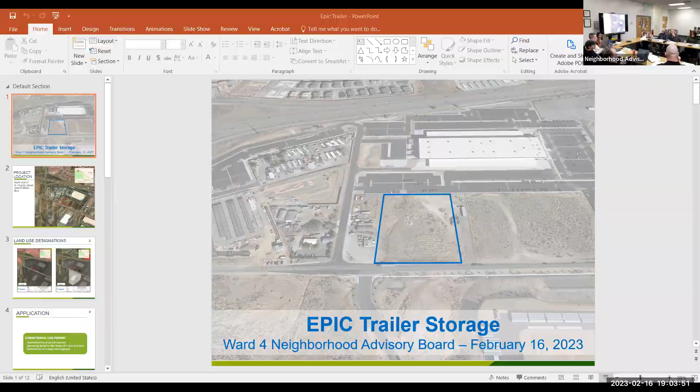Good evening, Mr. Chairman, thanks for hearing our item tonight. My name is Mark Sullivan, I work with NV Energy, and we're going to present to you Peavine Substation. What we're hoping to get out of this is to get some feedback and to educate you guys about what we're doing and why we're doing it. A lot of times when I look at neighborhood advisory boards, I heard somebody mention a citizens advisory board for Washoe County - there's a lot of nuances that people have in the neighborhood that we're not aware of because we don't live in this valley. I grew up out in Spanish Springs, so I'm pretty familiar with that.

I actually sat in the CAB out there for many years, so that's what we're kind of looking for. If we can make it better somehow, you guys would know how to do that, right? You could provide us with input about nuances we're probably not aware of. So hopefully that's what we're going to get tonight, some input from you guys.

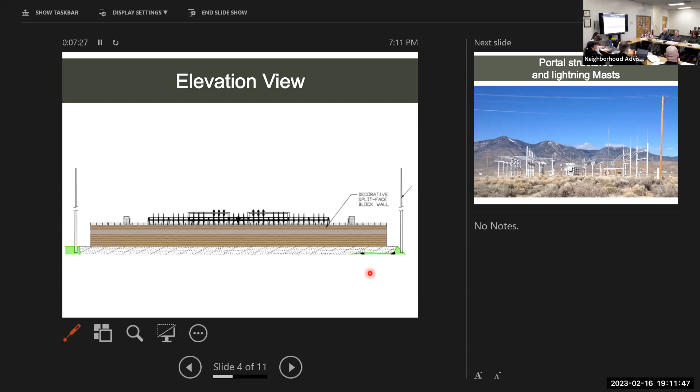This is an example of a substation, just because I didn't have an example of what ours has. If you look at the very far right side, you see a wood pole. To the left of that is called a portal structure, and we're going to have a portal structure at ours. The average height of a bus, the lower stuff that runs across the whole site, is about 22 feet at this site, and that portal structure comes in from the transmission lines. The transmission lines that run down Virginia Street are a 70-foot pole, but we bury 9 feet of it, so it's 61 feet above ground level.

So the wire that comes off of that and goes into the substation, I would anticipate this can be a shorter pole that's going uphill a little bit. But I don't design this stuff, so it could be as high as 90 feet to get up high enough to drop down in. We'll have a portal structure like that, and that portal structure is 45 feet. Then you see those thin masts on top, those are lightning arresters. If lightning comes into the substation, it grabs it there and grounds it so it doesn't knock the substation out.

So with those all told, you've got 45 and 50, about 60 feet in height. I can't imagine why you'd need a 90-foot pole, but that's what somebody mentioned to me - I think it'd be 85 or 90 feet. I think they're going to be closer to the power poles on Virginia Street. So anyway, the highest structure will be those structures outside of the poles coming in, the getaways going out.

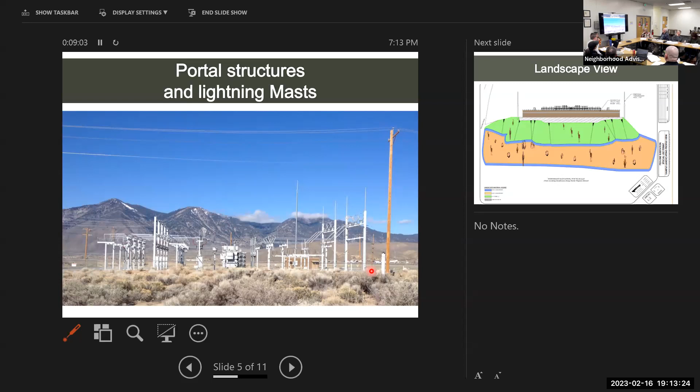So the next side, some of the concern - we don't have any water at this site. Typically when you don't have water at a site, you don't do landscaping, you use native landscaping, native seed mixes, spread them out there, and over the course of a few years you get some vegetation. We're going to try to do the least amount of disturbance to the soil that we can, because the native plants that are there today help a lot with soil erosion. But this is kind of a departure away from what we would typically do.

These are like the structures you see on the side of NDOT. You'll see goats, or a sheep herder, or I think it's kind of weird, the one down in Carson City where they have a deer right by the highway. It scares me every time I drive - I think someone's jumping on the highway.

So we don't want to get anything close to the road, but this was just a sampling - there's some cactus, some different types of plants. So we want to get some input from you guys. If there was something, like the history of the area, that we could do out there, some kind of scape or whatever it is, we'd be open to that. We'd just like some input on what you guys think of this, or if you have ideas of what we could do out there that fits the area better.

I know you guys talked about traffic - we don't have any traffic. During construction you're going to have traffic, but we won't have any traffic otherwise. We usually visit a site like this, a substation, about once a month for routine maintenance, to check on it, check on weeds, that type of stuff. We don't have a lot of fire calls, we don't have a lot of police calls, we don't have a lot of services to speak of in general. So there's not a lot of impact from these as far as the services or competition for services in the community.

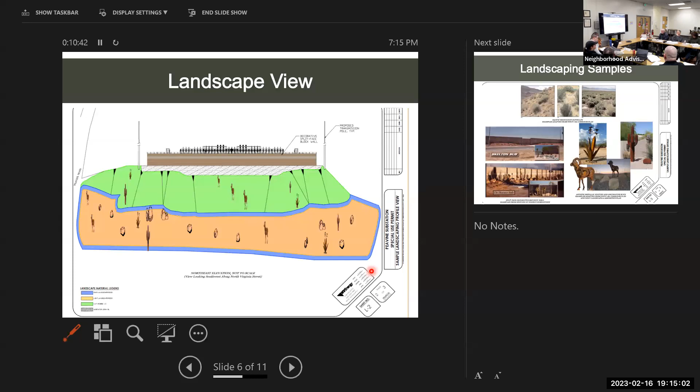Can we go to the next one? So this is some of the stuff that I just pulled down. The stuff on top there is kind of the native soils, what's out there now - you'll see some sagebrush or different types of, maybe greasewood or something like that, native in Nevada.

A couple on the left are actually some substation walls that we've done down in Vegas. And I hate to use that word up here - it's even more embarrassing, my daughter's a UNLV graduate.

The game's coming, though. They're coming up here to play basketball, so we'll get them. Anyway, so this is, I apologize, I digress.

So those subs are just an example of the wall, similar probably to the type of wall we're talking about building out there. You can see that goat is one of those ones that was off of NDOT's. There's cactus, some kind of aloe vera plant or something on steroids, it's huge. So anyway, they have quite a few different designs.

If you get off the freeway heading northbound 395, like going to Plumb Lane, on the left-hand side they have a couple like 3 or 4 trees. Out in Carson, they have those birch ones, but they're kind of weird because they're cut off, only like 15 feet tall with 4 or 5 white ones. I thought that was kind of out of place, but anyway, we'd like your guys' input on that.

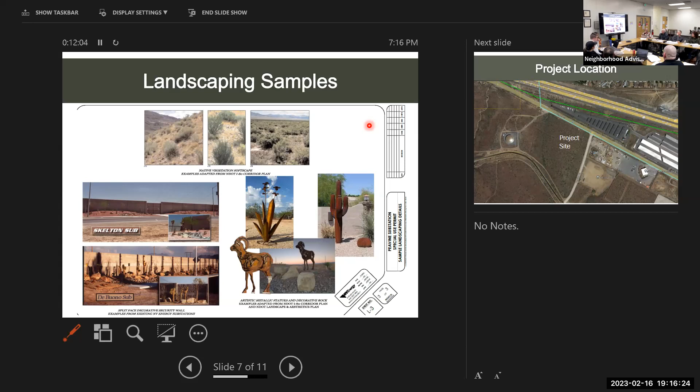Can we do the next one? So this gives you an idea again of the project location. That's Virginia Street, you see the water tank there? We're in between that water tank and over the right-hand side, you can see the dirt that appears to be graded. We're in between those two, at the spot right there where it says project site.

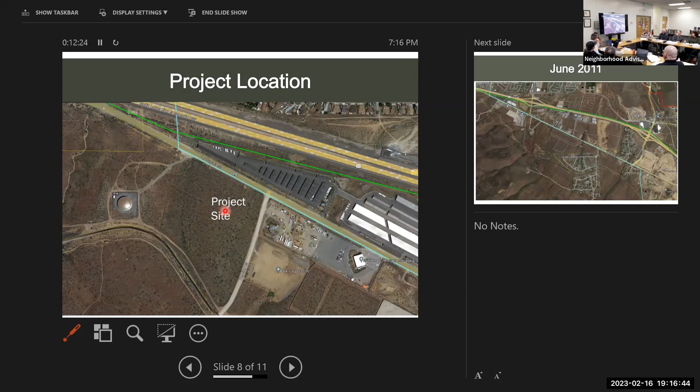Okay, can we go to the next one? So this was just to give you a little bit of an idea again why we're doing it. When I'm telling you we're running out of power, what we're running out of power to provide is the people that we currently have. My daughter, I just got done doing some work at her house, I put a microwave in and didn't have that.

She's over off of Wells Avenue and Holcomb, a 1924 house. So it didn't have a microwave, didn't have a garbage disposal, didn't have a dishwasher, didn't have a fridge with an ice maker. None of that stuff was anticipated back then. And now you've got people hooking their cars up to the system and charging their car. We just didn't anticipate the load growth that you're getting.

And so we track this stuff, and we try to anticipate when that load growth is going to exceed our capacity to serve. And then we try to plan something to put in. So that's what causes this.

Not to mention any kind of residential development, but this will serve all the businesses you have out here as residences, to give you more reliability - schools, churches, hospitals. Is that hospital out here? Not yet. I apologize, let's strike that. Okay, can we go to the next one?

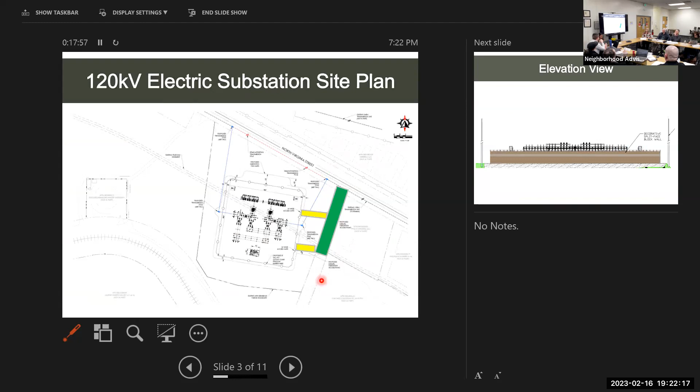Okay, thank you. So we will tie off Valley Road, it comes up to us. If there was an outage or something on the existing line, is there an alternative source to maintain power in the North Valleys? That's my question. Yeah, that's called the N-1 contingency, and we're required to plan for N-1 contingency. So if something gets knocked out, we have another way to serve you. We always like two ways to be able to serve somebody.

And so we have plans. In the system there are contingencies that can't be met, and we're always planning to fix those. It's a function of being able to have the ability to do that, being approved - it's hard to spend everything you want to spend. I don't know if you guys are aware, but Warren Buffett owns the company. Yes.

That's the guy that's looking to invest money, believe it or not. So we've never been in that situation. When I first started the company, we didn't have unlimited money. Now you do, but now we're being bridled or held back because the rates would go through the roof if you could spend a ton of money. So yeah, we try to anticipate that stuff.

We just got done doing some new distribution plans, called area optimization plans, where we have a lookout for 10 years. It's internal, just the same as this. We don't really like to put these out there in the public because of security reasons, putting all our power lines out there. One of the challenges is we don't know where the site's going to be. Just like even we didn't know where that site was going to be. There's a dozen sites that we looked at originally, and you never know where it's going to end up.

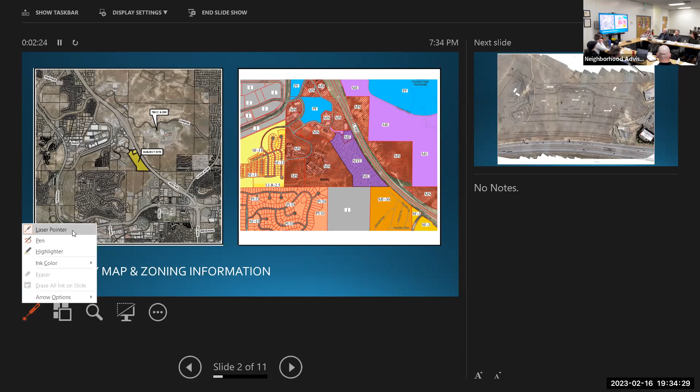This parcel was changed to mixed employment a couple of years ago with a separate project that never came to fruition, and that was changed to bring it up to conformance with the current master plan. So that's why it's a little different than the surrounding zones - it's already been brought up to snuff with the master plan.

We've got some multifamily zoning on the south and some industrial. That industrial parcel on the south is actually owned by NV Energy, part of their distribution system that the gentleman was just discussing. That gives you a little context of where the power is coming from, and we'll touch on that in a minute.

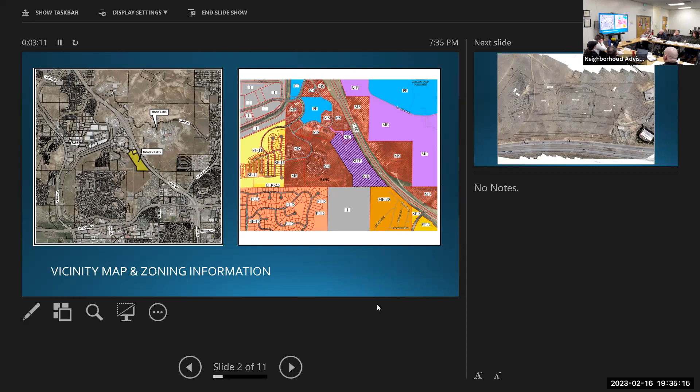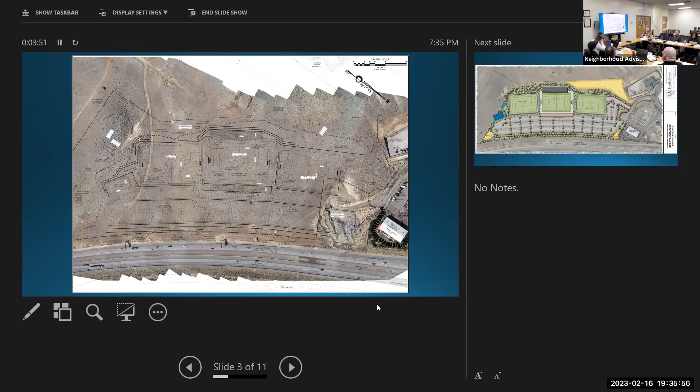You can see on the north side there's a couple commercial properties already developed. There's a little bit of grading that took place previously with another development, but for the most part it's undeveloped property, and the freeway at the bottom of the page is actually the east side of the property.

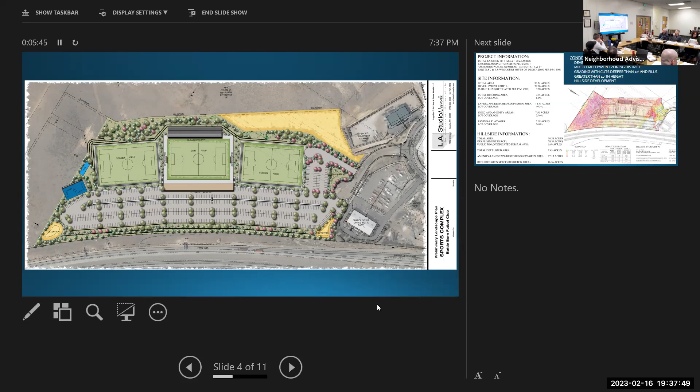So our request with this project is a couple things. Primarily, the request is for a sports arena or stadium in a mixed employment zoning district.

There isn't really a clear definition of what becomes an arena or a stadium. There were some other uses in the mixed employment that we thought fit well with what we're doing here, being a private club type facility. But after some discussions, we agreed with staff that we'll do the conditional use permit request for

an arena stadium type use in this zoning. The site has a fair amount of relief across it, and in order to grade the site to accommodate development, we're going to create cuts over 20 feet, fills over 10 feet. That's another conditional use permit request.

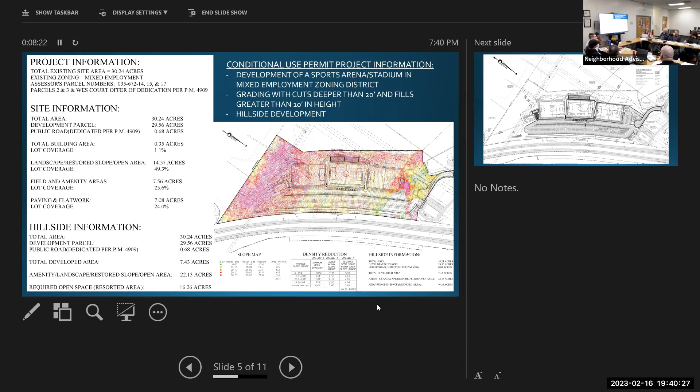We will still have mitigation on site to prevent an increase in runoff caused by urbanization, but that'll be handled on the next slide.

The rush is to get these fields up and running for the kids to be able to use them immediately. Full build out ideally would be up to 5,000 seats and a professional level type complex where you could host real competitive tournaments and draw people from out of town to participate in that sort of thing.

We'll use a wall system, a tiered wall system with landscaping along the freeway. We'll break our parking lot with a vertical step as well. The clubhouse will be built into the hill with parking underneath, and club level amenities at the field level. The bleachers on the west side would be stepped into the hill as well to try and conform as best we can to natural topography.

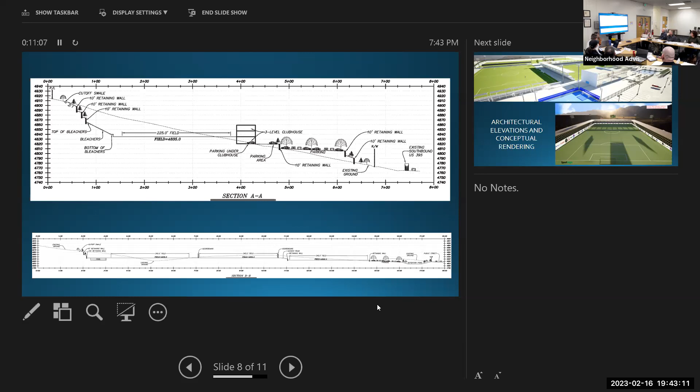The bottom is hard to see at this scale, but that's from north to south—it's pretty boring in that orientation. The main grading is from east to west on this side. There's a few more renderings, just to give you an idea of the concept.

Again, these are not project specific yet, but it just gives you a feel for what this complex is intended to be. The fields will be lighted.

We are meeting the code requirements for field lighting. There is a provision that the lights have to be off by 10, or within 1 hour at the end of the last event.

So we are right against the freeway. There is a fair amount of relief from this site to any adjacent development. And these lights are all, of course, designed to project directly down to minimize the spill.

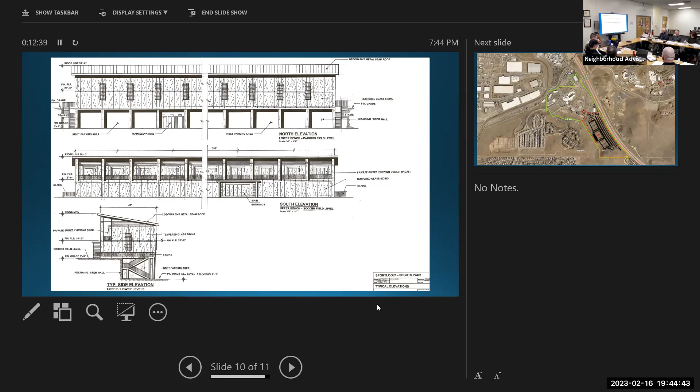We are, at the request of city staff, conducting a sound study as well, just to make sure we're not exceeding any code limits on noise for a large event. But past experience in this area with sound studies shows the freeway typically drowns out just about anything. The background noise is pretty intense, so I feel like it's a pretty good fit.

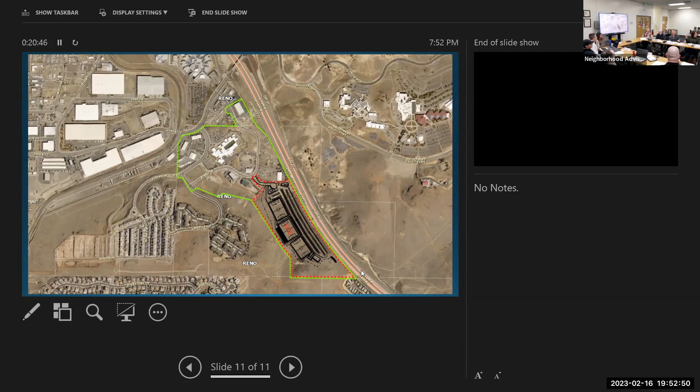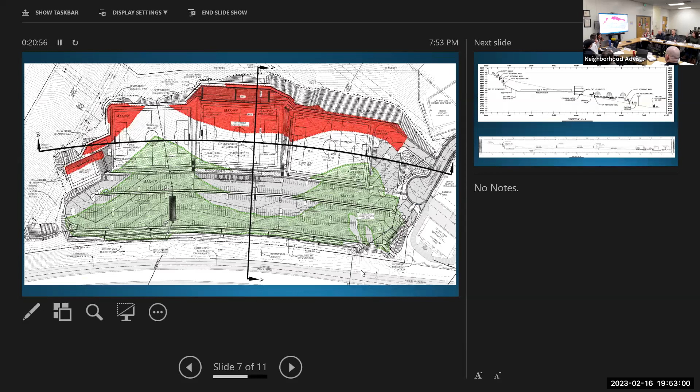I have just a little concern about road access getting there. If we could pull that up, just literally getting into the parking, is there just one way in and out? Yes, that's correct. So this is Benny Lane, which has multiple points of access to Park Boulevard. The nice thing about this site is you have direct access right to the freeway for regional purposes. Once you funnel down to the site, we have an oversized cul-de-sac, an extra wide point of access, and then there's looping through the internal site. Our secondary access for emergencies would come through an existing facility, tying in so that we're meeting the fire department's needs, and we've already had discussions with them about making sure they're happy with access.

Another question I had was, is there a pool? Yes, a pool would be part of the amenity package. That's really nice. We have a lot of really bad weather here, you may have noticed. Would it be possible to have the pool covered? I don't know if that's part of the plan now, but because of the weather, would that be possible? We'd have greater utilization in the winter months if we could have coverage on that.

You want me to speak to that? Yeah, if you don't mind. That is great input. You know how they used to put the big bubbles over tennis courts and stuff, so they can take them off during the summertime and benefit that way? The idea was to utilize those sort of temporary structures over the futsal court and the pool. Whether one would cover both or we'd do two is one of the ideas we talked about. I don't know if we would do that immediately, but it could be part of a phased approach.

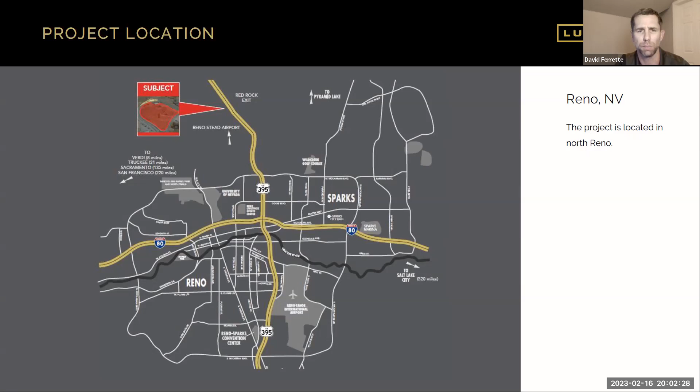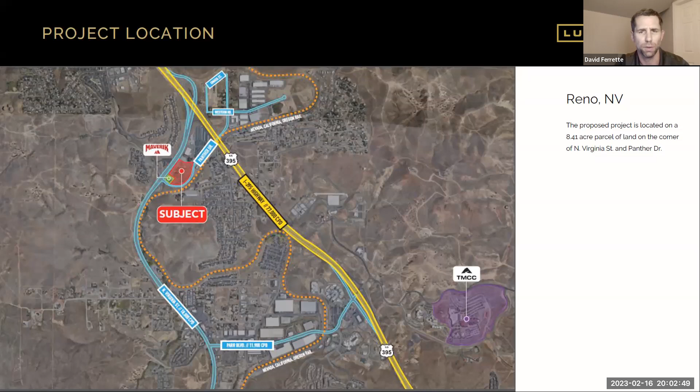A little bit of a zoom in right there. It's 4 lots that we're consolidating into one lot. We're in the process of consolidating those lots now during our condo plat. That's actually one of the things that raised the flag—I had to come back here for an amendment to the tentative map. If you want to go to the site plan, that's probably the best one to walk through everything.

There we go. So this really hasn't changed a whole lot. Building A was revised slightly in direction, and we were able to squeeze out a few more units by making a few larger ones smaller and expanding C just slightly. Our square footage went from about 115,000 square feet to a total of 119,000 square feet, so a little over 3%, going from 165 units to 184 units.

Point of entry, we still have 2—that has not changed. Utilities haven't really changed much, and our sewer and water demand hasn't changed much. Our grading is basically the same as well. So I'm just back here to answer any questions anyone may have about the product or why potentially we made these changes that were previously approved by the city, or just anything else.

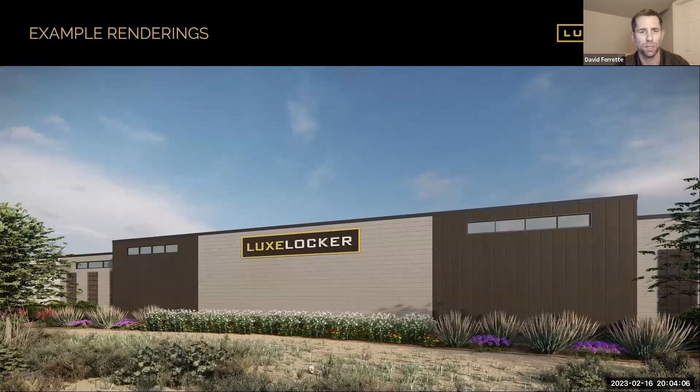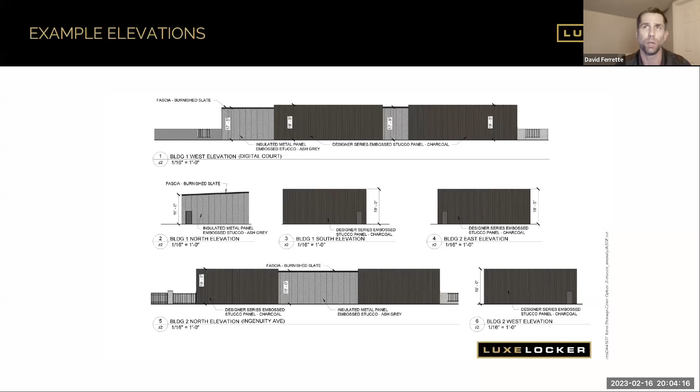If you want to keep going, you can kind of see these are renderings—if you want to slowly go through the next images of what it's going to look like on our site. We also have some pictures towards the back end of completed projects to give you an idea of what we've done in the past. We don't have a prototype like a McDonald's or a Taco Bell—it's all site adapted, so they look very similar, but each of our sites is its own design. This one's in Havasu, where it all started, that's where we're based out of. I'm out of Austin, but the corporate team, which isn't that big, only about 12 of us, is based out of Havasu.

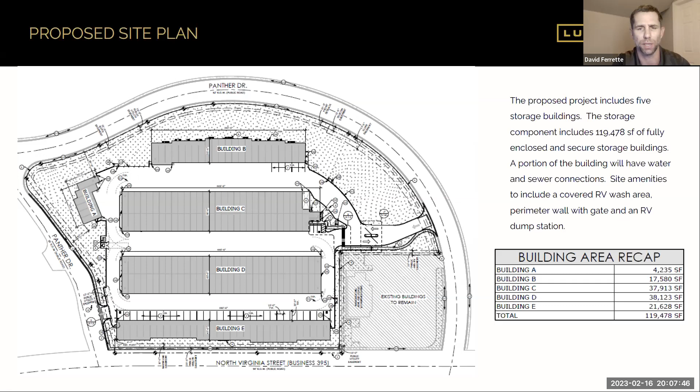And there's a long driveway for that queue. We're in the process of engaging the traffic engineer now, and whatever they recommend will be required to implement. Anybody else on the dais?

No? Okay, I'm gonna open it for public comment. Anybody? Seeing none, thank you very much, David.

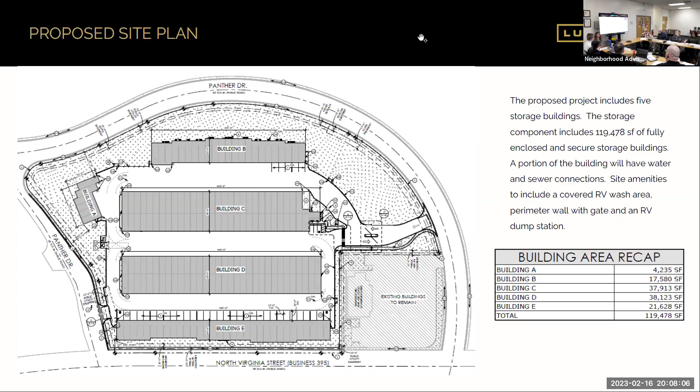I'm glad to see you back and see that you're still moving forward, because I think it's a great project. As my colleague said, because I live right there, I know the issues, so as long as you're addressing them, I think we're really good. Thank you for your time, sir. Thank you very much, all.